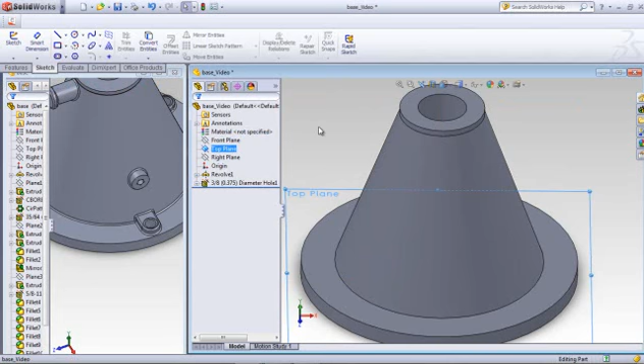So we'll create this extrusion and rotate it around using the pattern. But first we want to get our orientation, so the top view looks something like this. We're going to create a sketch plane, so we'll go to sketch and just pick that face. Don't have to create a work plane on there. And we'll start drawing, so we'll zoom in here a little bit.

I'm going to draw a circular deal here, then I'm going to draw some lines, and it has to go back in there a little ways. And that's my general shape.

Now I'm going to go in there and trim this out of there. Okay, and now I'm going to go back to that front, or excuse me, the top.

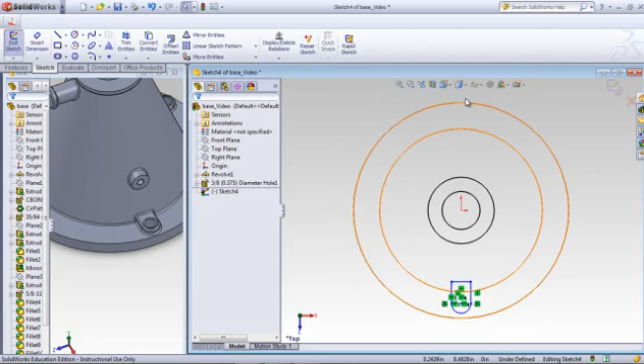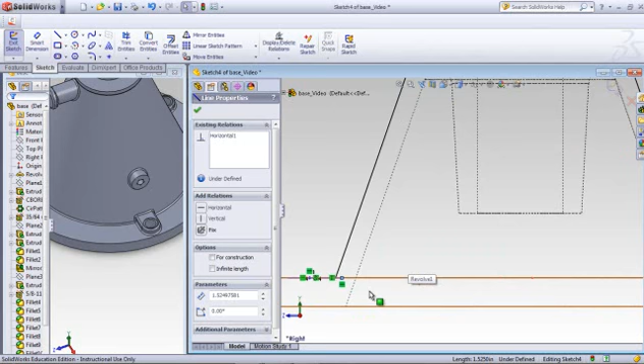I want to be careful here because I need to go to wireframe, and I need to make sure this line is somewhere between the outside and inside of that wall thickness. Now I can also go to the right side and see that it is inside this area here and that area there. You can see the line, the end of the line. So I'm good on that, I just have to make sure I stay on that.

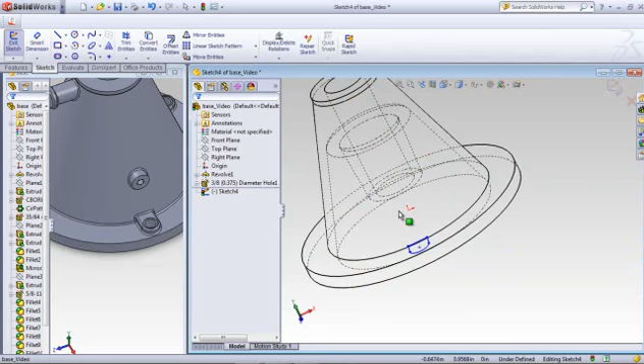Okay, and I'm going to turn my shading back on. So now what I want to do is put in some dimensions, and I know the radius of this wants to be, I believe, 0.75.

And I want that thing to be lined up. I'm going to go back to the top view to make sure that's lined up there. So I might do something like this, add a relation between that center point and that point, although it's not letting me grab the center. Okay, we'll go there then. That and that, we don't want intersection.

So I'll put a dimension. I can't put a dimension, I have to have a relation, which I think that center point is going to be okay. And there's nothing, I can't go coincident on that. So I think I'm alright, I'm there.

Notice it's not moving, so it's locked in. And let's see, we'll go in there. We've got that radius, or let's see, we got to put another dimension in, the center point here, the center point there. And I missed it somehow.

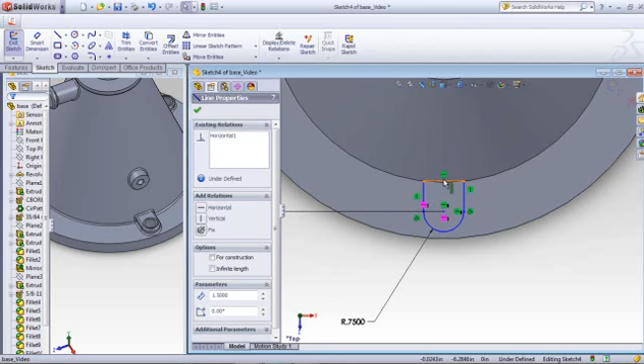Okay, now again I have to be careful because I'm pretty close on that line now. So I'm going to drag it now. I thought I was going to drag it. Okay, well let me drag it, so I'll put in a dimension from this to there, and we'll make it 1.2.

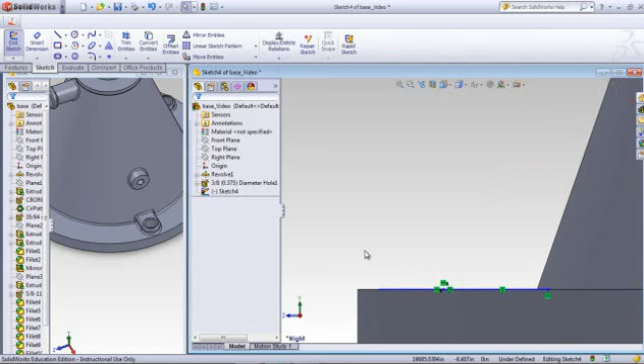And that should go in there just fine. Now again, we can go back and look at our right side view and see that it's inside there.

And it still says it's underdefined, so let's see. And actually, I might be able to go with that add relationship now, in that point right there. And none of those really, the coincident, I guess. See, that just won't get it. What I'd really like to see is vertical or something to that effect, but I'm not getting it.

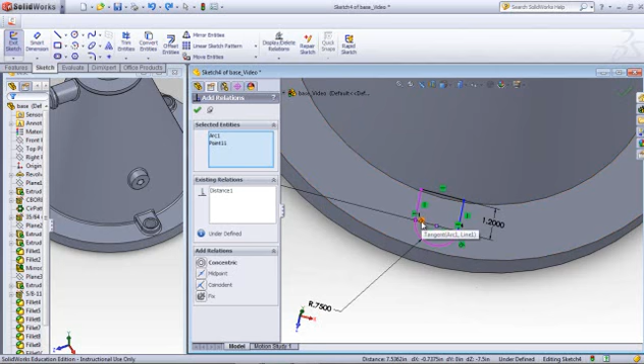One thing I noticed, yeah, there's my tangent, there's my tangent there. So I think I'm good. It looks like, and if I went and did a fix, add a relation, and grabbed this piece here and fixed it, I thought that might take care of it, but obviously not. I don't see anything else I'm missing there.

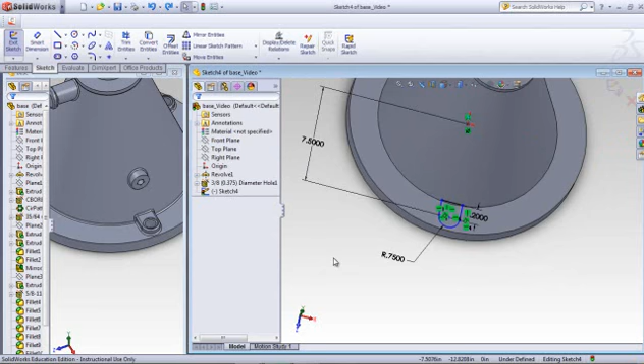So I'm going to just go ahead and right click and finish the sketch and go ahead and draw the extrusion. So I extrude the boss and I'll grab, it's acting like there's something. Yeah, there it goes. Merge results. The distance that thing needs to bump up is 1/2 inch.

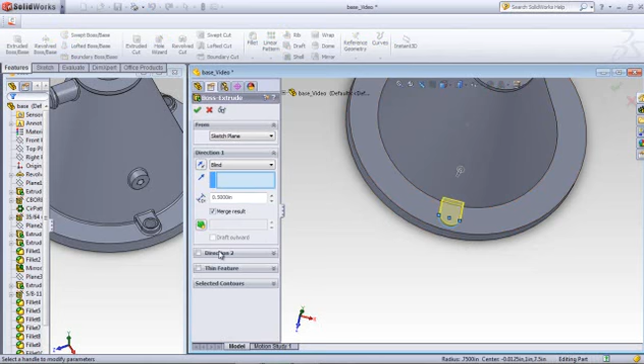Okay, notice it may not be okay on that line. See how we've got some material left? If that line is straight, you've got an issue. And it is straight. So now what we have to do is go in there and click on this and make that 1.3.

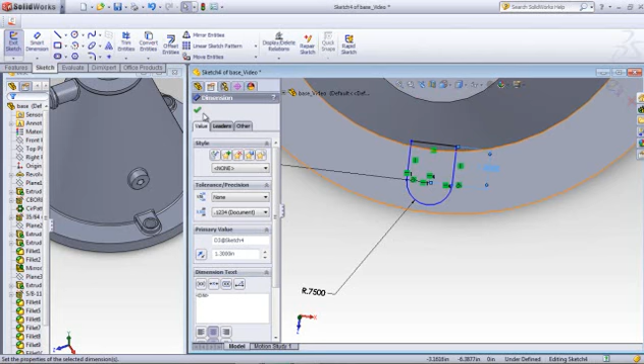The key here is we've got to be real careful. We don't want to go too far. Now you can see there's no gap in there. If we go too far, then from the bottom side you would actually see a piece sticking through right in here. So you have to be careful there.

Okay, then what I would do next, I'd probably hit the save button. Got something worth saving. I guess I'd go in there and put in the hole next. And it is a counterbore hole. The first diameter is 0.88. The counterbore diameter is 1.25. And the depth on that is 0.06. Be specific.

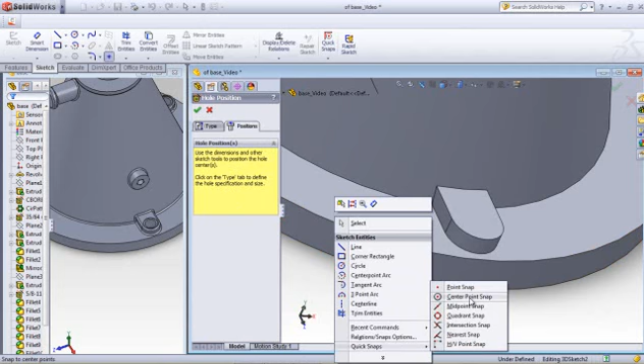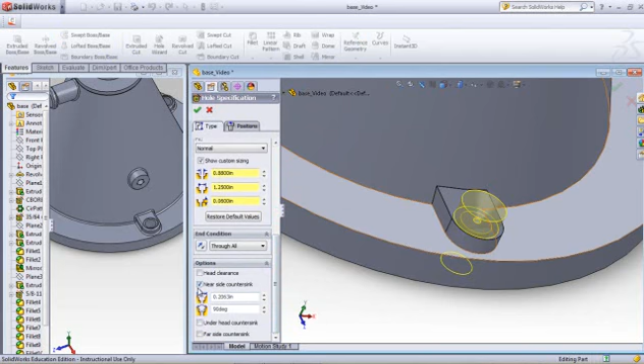And then I'll go to position, 3D sketch, right click, quick snap, center point, and grab the center point of that. Let's see. Oh, it said countersink, but that's a counter. I want counter bore, and let's see, I might have something. Yeah, near side countersink is turned on, and I don't want that. That's what it was. And that goes all the way through.

Then I guess the next thing would be to put fillets on after I save. Actually, yeah, I can go ahead and put some fillets on, I guess. Sometimes we wait on those. And that fillet is 0.125 unless otherwise specified, and I don't see that anywhere. So 0.125. And I'll pick this edge, that edge, and that edge. Fillet again.

Pick that edge. Now note it went all the way around. That's okay. And then finally we'll get the top. So now the other thing is this kind of needs to be cleaned up here. We might go back and take all three of those off. Hold the shift key and then we can delete them.

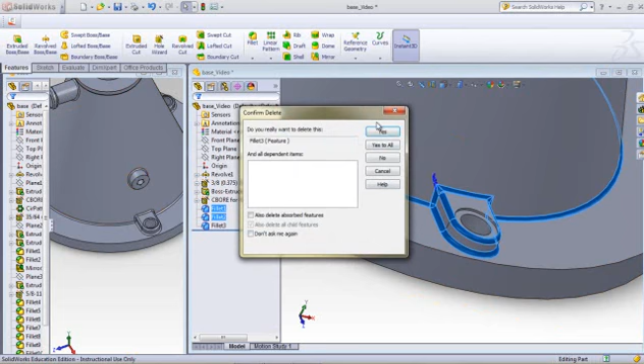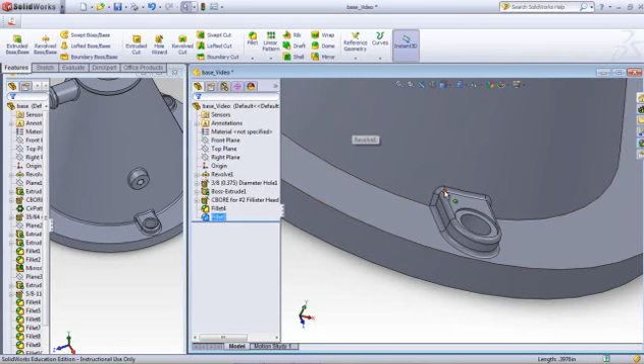Okay, so if we get, that was a little different fillet process. Let's see, let's go in there and grab that. Fillet this, it'll look a little different. Notice that looks a little better. It's rounded better. So that's a good thing.

Okay, then we're going to do our linear, not our linear pattern, but circular pattern. And it's asking for the axis, so I can pick any of these cylindrical shapes. We don't want 4, we want 3, equally spaced. Notice all we got there was the fillet, so we still need to get a couple more pieces. So we need to get that and that. And it looks like I didn't get the hole. Interesting, it's not showing up here, but we're gonna go ahead and click it and see if it does it. Did not grab the hole.

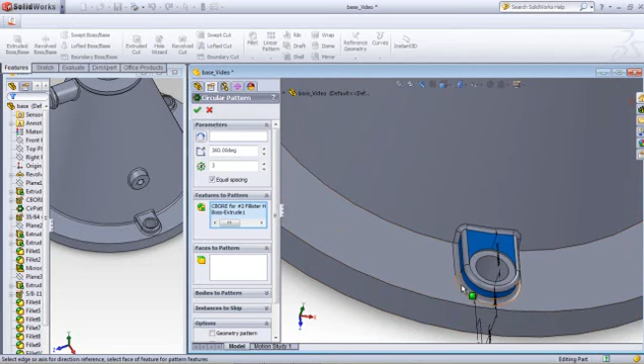So we'll try them again. Circular pattern, features to pattern. Okay, so we'll go in there and pick. There's your hole finally. And then the fillets. And then these fillets, I'm a little concerned that that's still showing up. There we go.

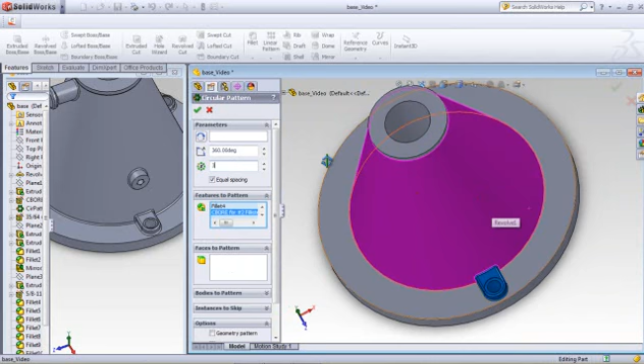And again, I want 3 equally spaced. I want it to be about that axis. And okay. So that takes care of those. Again, I'd probably hit the save button.

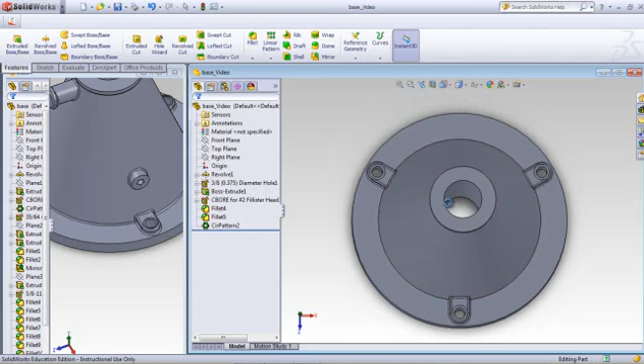Now I want to reorient this so that the top is, so we know this is the right orientation. And what we'd want to do next is maybe put in this boss here. To do that, I have to go find the right plane. I'm betting it's the front. And want to offset from that. So I want to go reference geometry plane. And I want it to be parallel, and the distance on that to come out to the very front edge, or to the back edge, 4.13.

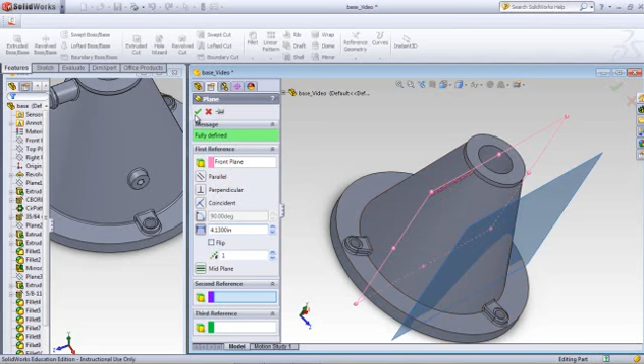That's the right direction. Then I'll make that the sketch plane. Okay, then we can go back and look at that from the front. Draw a circle. Dimension that. And that dimension is 1.5.

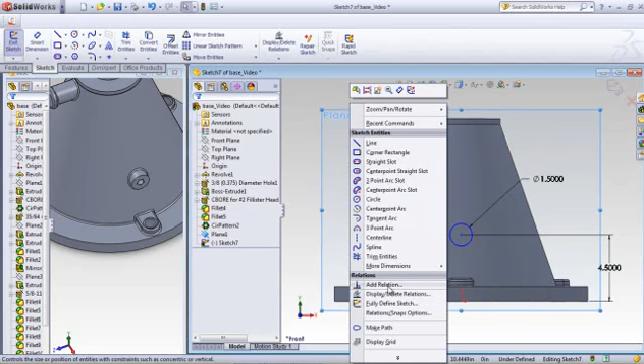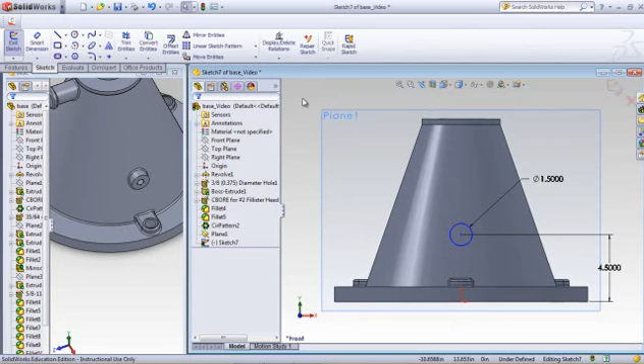And dimension from the center point to the bottom. And that's 4.5. And the other direction should be lined up. It says it's under define, so we'll go ahead and try to put a relation in there. Okay, then we do an extrusion. We picked it, and we need that to go 1.63.

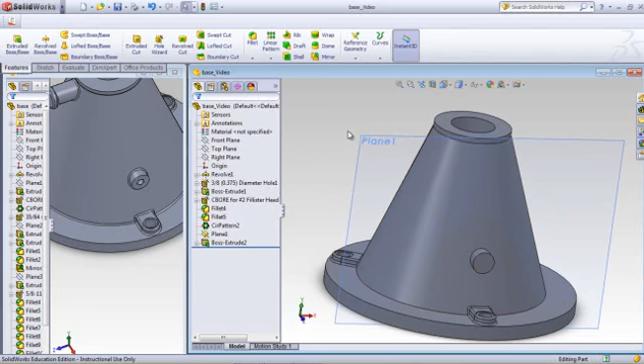Merge. And there's my merge. Save that. Now on the drawing, what it tells you is you have to punch a hole through here first, and it's not the tap drill size, so be aware of that.

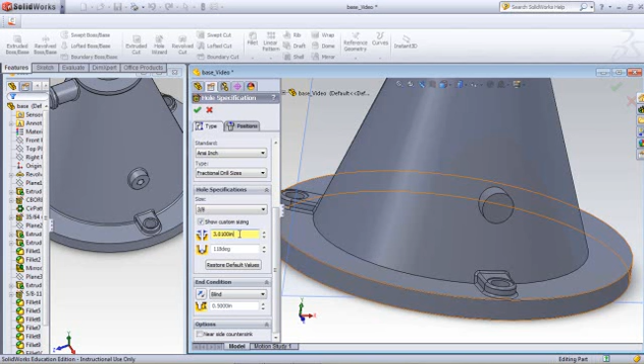So hole wizard. Looked like I already had something picked there. Okay, so we want that to be a threaded hole. Actually, the first hole is 0.53 diameter, so it's just a simple hole. At 118 degrees, let's say up to surface. The inside. Whoops, I forgot to do it again.

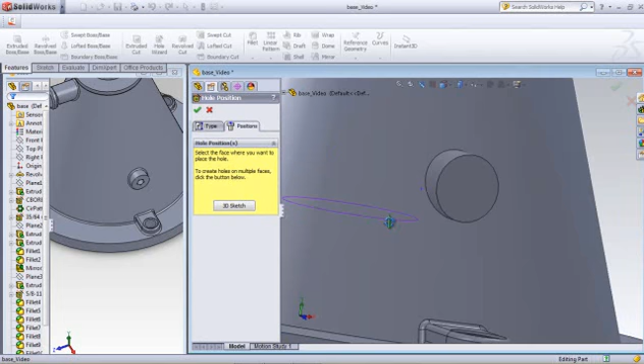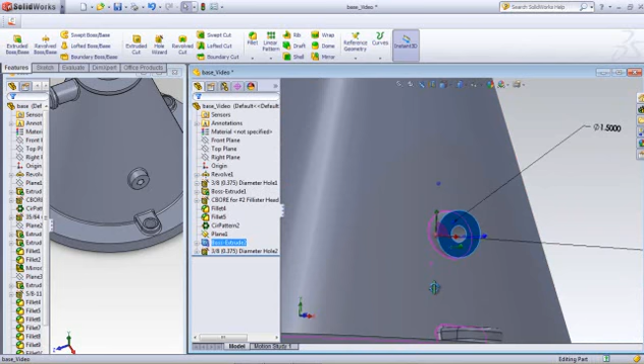3D sketch, right click. Quick snap, center point. And there you have that. Now that's the hole that actually goes through to that surface there, because the pin of the screwed part has to go in there.

And then we'll punch the other hole in. It's threaded, and that is a 5/8 11. Position. Now notice this time I didn't get any position on that as far as the 3D is concerned. So let's see if we can right click. Oh, and I also have a position out there, so let's get that out of there.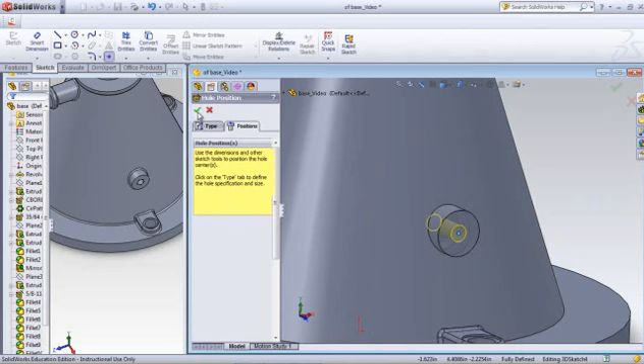Position, 3D sketch, again right click, quick snaps, center point, and let's see, the hole position is right. That is a 5/8 tapped. The only thing I didn't check on that was if we made that threaded. It's threaded.

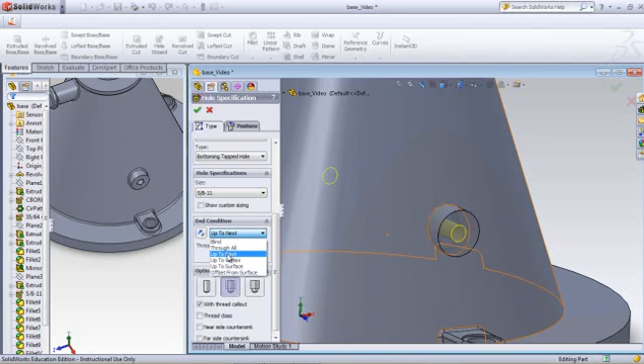And we really want to say probably up to next. Actually, that wants to be up to surface. So we can pick this surface right here. Save.

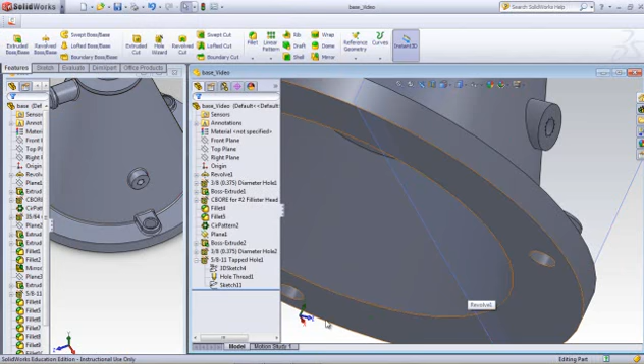Okay, and that'll be the end of this video.

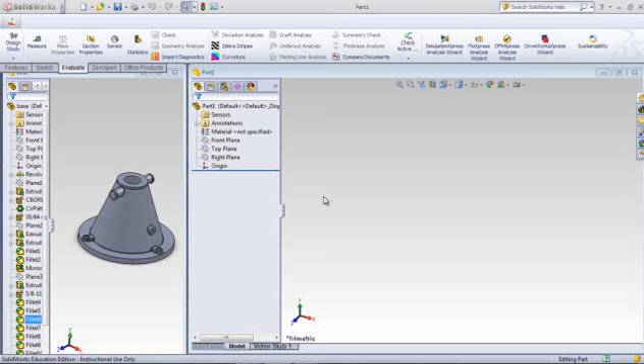This video will start the construction of the stock support base for the stock bracket for the cold saw machine. We're going to start out with a shape that looks something like this. We'll draw that sketch and then revolve it.

First, I want to go to sketch mode and draw on the front face. I'm going to start drawing some lines, starting here and coming out.

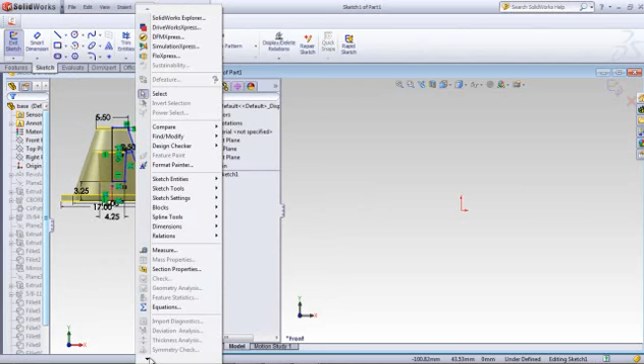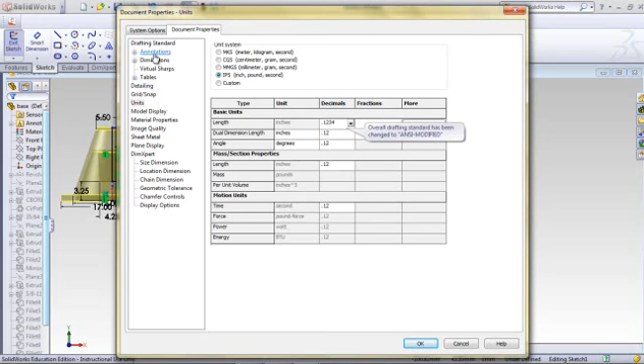I just noticed I'm still in metric mode, so I need to go to Tools, Options, and under Document Properties go to Units. I'll change that to inches, pounds, and seconds, and change my display to 4 decimal places. I'll do the same thing on dimensions. Hit OK, and now we're ready to start drawing again.

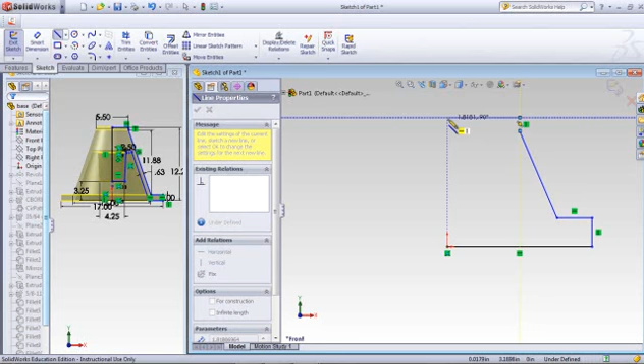So we'll draw a line. Much better. Now you might want to draw a line up that way, and then we'll come back over, and then finally we'll go all the way to the bottom. That's not exactly what it's going to look like, but we'll go with that for now.

So we'll put in some dimensions, going from this edge to this edge - always get the outermost part. I want that to be 17 inches divided by 2, I believe. Make sure you look on the second page of that packet I gave you - there's a detailed drawing, but it's 17 divided by 2.

Again, always go with the outermost dimensions. It says I need to go from this line to this point - that needs to be 12.85 divided by 2. Then from this line to this line, zoom in on that, needs to be 5.25 divided by 2.

Now that looks a little bit out of whack there, doesn't it? So we're going to go in there and go from the bottom to the top, and that needs to be 12.25. Oops, daggone it.

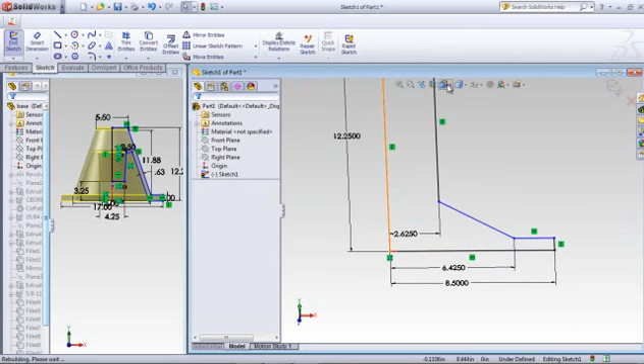Okay, then from there we'll note that this dimension for that line, from here to this point, needs to be 0.38. Looks a little better. It also says that from this line to this line needs to be, I believe, 1 inch.

And it also tells me now that that's fully defined. However, I'm going to move this dimension up here just to get it out of the way. Note that there will be a chunk of this cut out.

So what we need to do is draw another line along here somewhere, coming out this way. There's going to be another line up this way. We don't know how long it is, so we'll end the chain and draw another line that goes up this way.

Then we can put some dimensions on those as well - on the dimension from this line to this line. That's an angle in degrees, so we don't want that. We want that to be in inches.

Oh, the first thing I have to do is make that parallel. So we'll add a relation between these two lines and make those parallel. Now we'll put that dimension back in, and that number is 0.63.

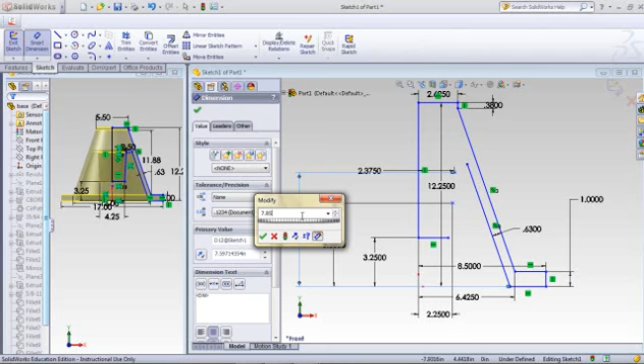Now those are my gauge points to put in a new line. So I'll draw a line in there between these two points.

Done with that. And then I can extend this line. Well, let's see, we're not going to get that. It's going to extend the wrong way on that, so this one needs to be extended out. Then I can extend this. Then I want to trim that back out.

Okay, then finally what I need to do is go in there and draw a circle. I'm just going to draw that out here in space somewhere. Put in a dimension. Now be careful, that's a diameter, and it's asking for a radius, so it's 0.5 times 2.

Okay. And then we're going to go in there and add some relations between this, and actually I probably need to move that over a little closer, about right there.

And I'm going to add a relation, and all I did was drag that over between this circle and that line, tangent, right click, and I can actually just delete that line. I still need the arc, and I need this line here, tangent. Oh, better undo that.

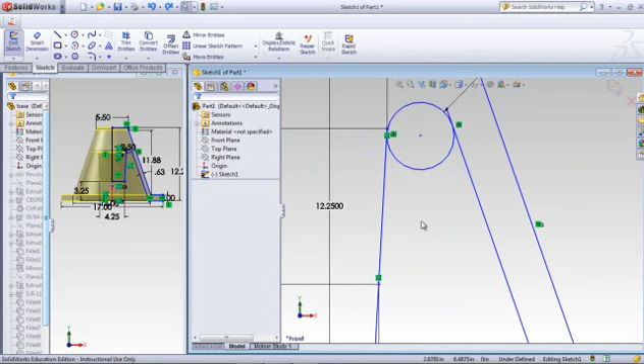Okay, so let's zoom in on that. And we'll note on the right side, you can see it already needs to be trimmed out. So we'll use the trim command. We'll trim the arc, and then we'll trim this line out.

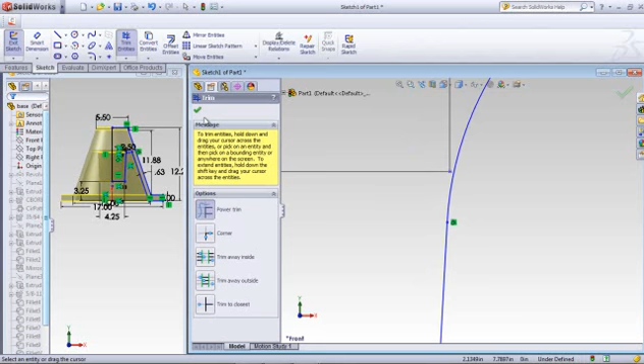And we'll note that if we keep zooming in on that, we need to trim, trim too much. Let's trim out that. Okay. And that takes care of that shape.

Now let's see, it says it's underdefined. So let's see what else could we give it that needs to be. I'm not so sure that there's anything that really, one thing we can do here is we can add relation, and we'll fix that line.

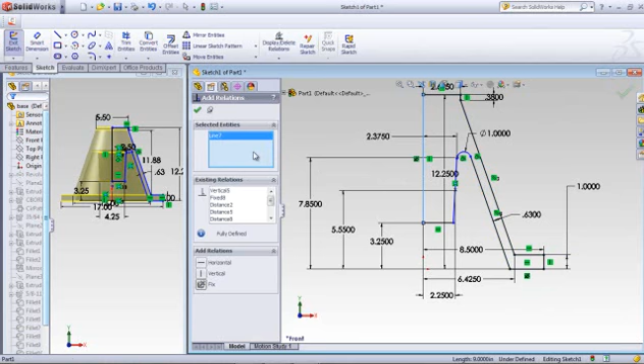And then we'll add relation and fix that line, and notice that locks it in place. We'd lost our origin, so it's still at the origin, but we had lost that.

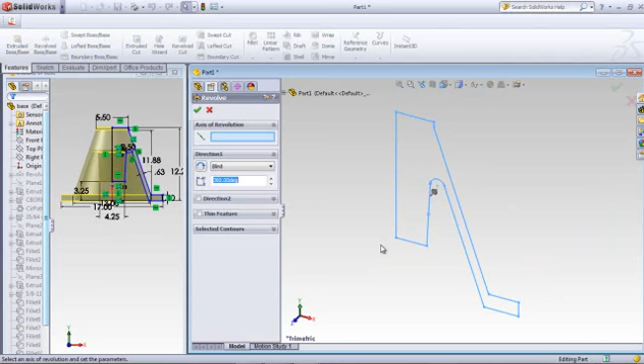So now that thing is ready to do a revolution. So we'll exit the sketch, and we'll do a revolved base, and the axis will be this line right here.

Now make sure that it doesn't say that it's going to be a thin feature. It needs to be a solid. It really doesn't matter which way you flip that direction. It's 360 degrees. Note that you could go, if you only wanted half of that.

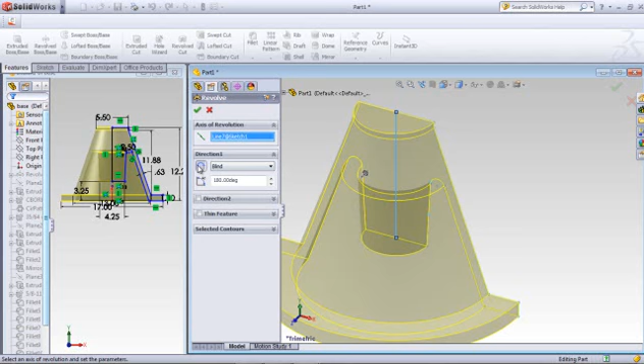And then if you flip it, it'll do different things as far as that goes. There you can see that it's flipped. So you can actually go at any angle there. We want 360. We want the full sweep.

Let's see, it should be crunching. There we go. So that's the original shape there. I think we'll stop there. We'll go in next and add some more.

Well, let's go ahead and punch a hole through there just for fun. We'll do the hole wizard, and it's a simple hole.

And then we'll go in here and blind, and actually that probably could just be up to next, or we could say up to a surface. I don't know that I want to go through all because there might be something added later. Let's see if up to next will take care of it. It doesn't. So we'll go in.

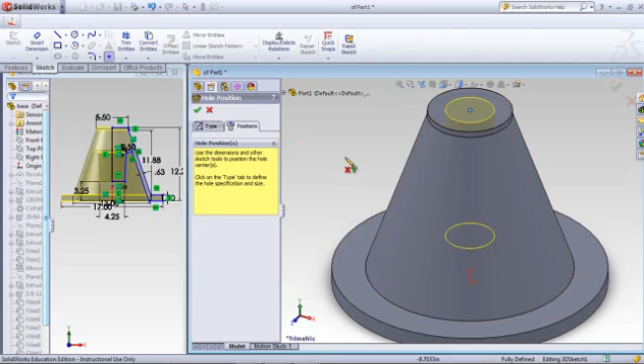Oh, shoot, I forgot to place the position. If I use that 3D sketch, if I right click, quick snaps, center point snap, and grab that arc, now I should be good.

And I'll rotate that around to make sure that it does do what it says it does. So I'm good there. And next thing I'll do, probably I should have done it before, is hit save.

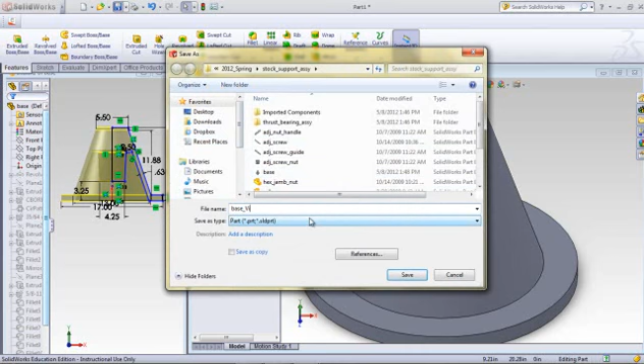Okay, now that we're saved, we're good to go on that. That's all I want to do on this video, and we'll pick up with some more parts here in just a minute.